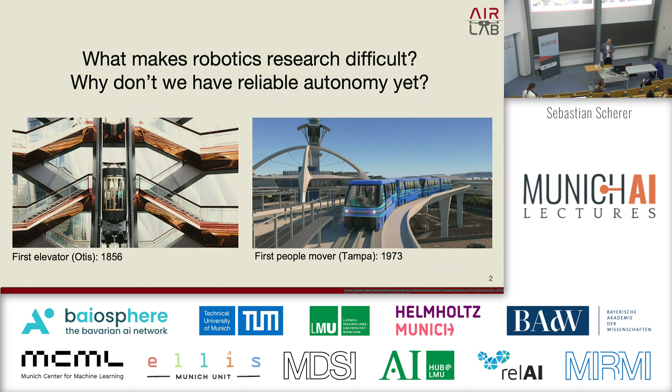Thank you, Daniel, and thanks for giving me the opportunity to talk a little bit about what we're up to and how we're thinking about autonomy. So I actually want to start at a very high level, and then we'll dig down into more of the details. If you think about it, we had elevators about 200 years ago, and we're still struggling with other autonomous systems today.

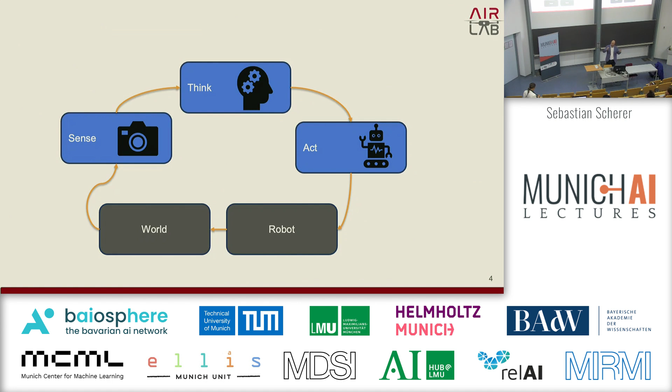So we're seeing that there's a lot of push to try and get these systems out. As I'm sure you're familiar, we have this traditional sense, think, act cycle, right? So what's the difference between an elevator and, let's say, a drone or a robot that's self-driving or off-road driving? There are really three main differences. For perception, for an elevator, and elevators are actually more complex than I'm making them here, but just to give the example, you have limited sensing with much lower noise. You know what state you're in, while for drones and robots, the perception space is much larger.

In terms of thinking, you have a larger action space. Instead of just discrete actions, you have an infinite set of actions, and when you execute something, you might not end up where you think you were going to be. So you're going from a discrete action space to an infinite action space. On a very high level, one way people have tried to handle this is to try and remove uncertainty. That happens in our everyday life. If you're driving on the road, if you're at an airport, you try to remove uncertainty by adding rules, by making right angles, by adding structure.

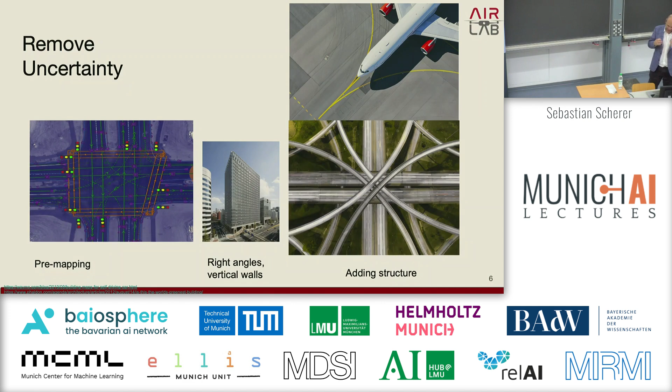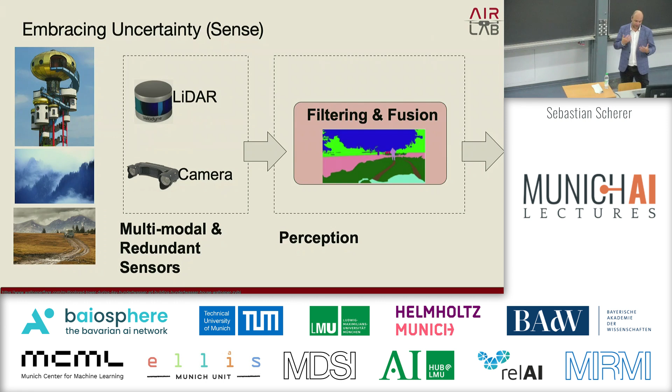But the kinds of problems that we're interested in are really where we are operating in these uncertain environments with much less structure, and you have to deal with that lack of structure. So really trying to embrace this lack of structure, you have to think about how to handle this uncertainty. The way we do this is at a couple of different levels. One is by having multimodal and redundant sensing, lots of filtering and fusion. And then on the execution side, to allow multiple futures and minimize the assumptions on the system.

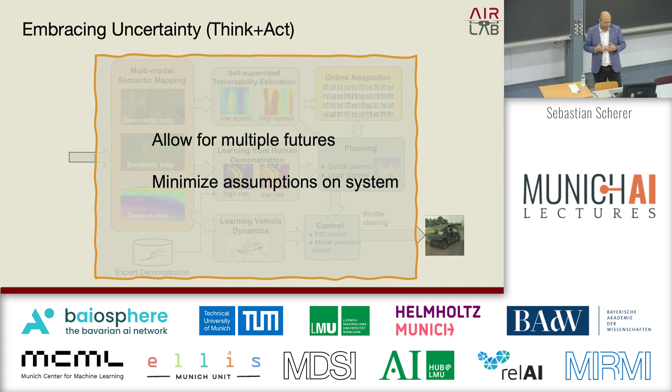Next, I'd like to give you an example of how we looked at this for the SubT challenge, and then how we are going beyond that right now to further handle these harder situations. One example to think back on: a lot of you might remember the Thai cave rescue for the soccer team that was trapped. The way they actually navigated was by hand drawing maps of the caves and trying to figure out how to get there. This lack of information was a real challenge.

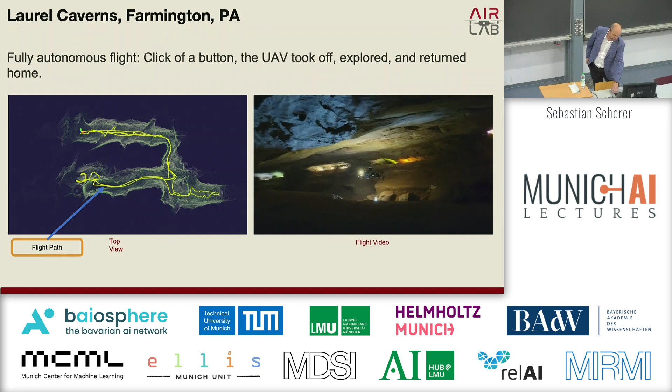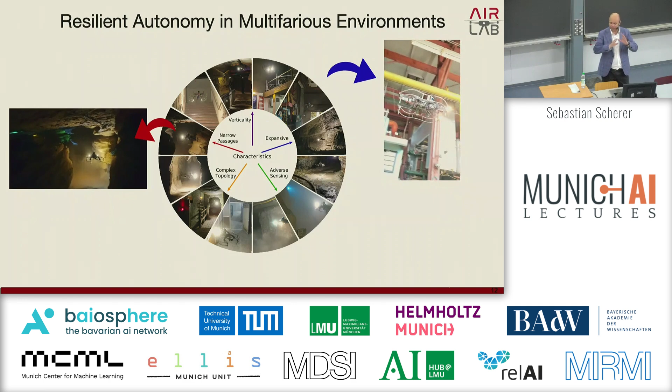As part of the SubT challenge, we looked at how we can solve this problem, not only for caves, but also for other situations. It really brought out a lot of challenging situations. Caves don't have any structure. You don't have level ground, you have slopes. There's lots of complex geometry sometimes. You can see here there's lots of thin obstacles. And then you have to navigate in these tight spaces with a complex topology. And then also vertical motion, as well as degraded sensing. Here we're flying, for example, inside a mine where we're kicking up some dust.

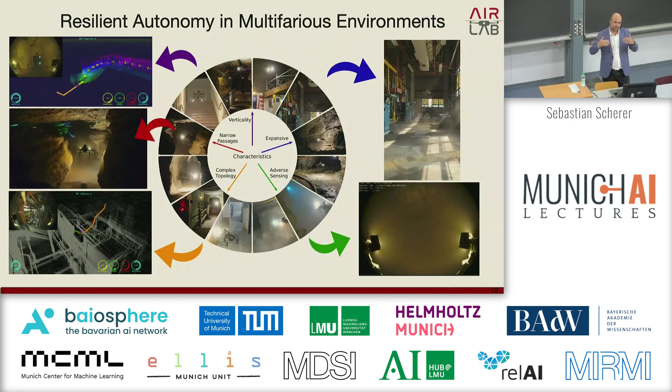This was all motivated by the DARPA SubT challenge, where there were three different types of environments we had to look at. So let me show you a little bit how we did this in a more traditional way, but also what it would take to incorporate learning, and how we improve the performance of these things without throwing away everything and saying, okay, we'll just go from image to action.

So one of the challenges actually starts with the problem formulation. The problem is not just an exploration problem where you're trying to maximize information gain of the area or something like this. You actually have two objectives. One is you're trying to maximize the map you see. At the same time, you're also trying to maximize the coverage that the camera has on the map.

For example, to detect objects, we typically use a camera a lot, and the camera has to look at something to be able to see it, right? So it doesn't just help you to create a map of that area. But our LiDAR scanner can see much further, so it can create a map 100 meters out, but the camera can really only reliably detect objects maybe 10 meters away.

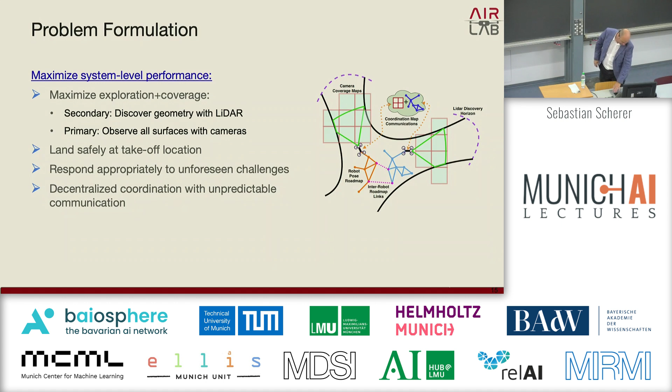So the way the system is decomposed is in these 5 components. There's the mapping part. There is the behavior executive that really tries to ensure that the system always has something to do and behaves correctly. A global planner, a local planner, and the controller.

And actually the behavior executive is quite important because in this setup, you don't really have a human operator that has the mental capacity to do anything, because they're running a team of about 10 robots, and they cannot control an individual drone and give inputs. So everything has to be fully automatic, and this behavior tree decomposition was quite useful to give it robustness.

One other thing to note here is you can see in the exploration tree there's actually many different behaviors, and one of the things that turned out to be quite useful is to have different behaviors if different algorithms fail, right? All of these algorithms have some shortcoming. And so there's one fallback algorithm in there, for example, that's the equivalent of go in a random direction, right? Because anytime we're just hovering, we are not gaining more information. We're just burning energy.

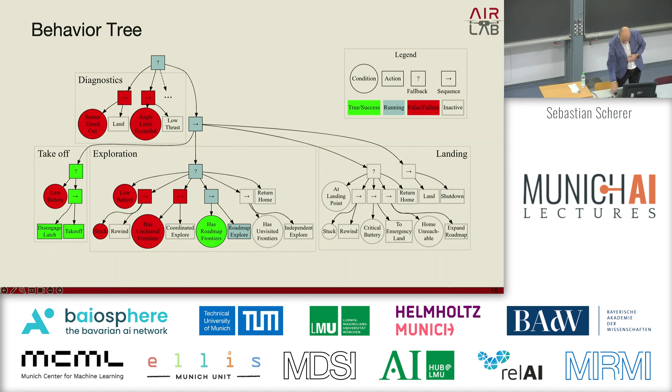So there's a couple different types of maps that we create: an exploration map, a navigation map, and a local planner map. Let me first tell you about the global maps. We want to create these frontiers for the system to go towards. In this visualization, which you'll see a couple times, the green map is what we have seen with the camera, and the gray map is the LiDAR point cloud map. So you can see that we see a much wider area with our laser scanner and a smaller area with the camera.

A typical way to construct these search points is to look at the surfaces and the edge between unknown and known, and that's actually not so effective, especially if you have things like dust and so on. So what we're actually doing here is subtracting the map of what we've seen with the camera from the LiDAR map to get our next goal points.

What you get from this subtraction is actually the points you want to look at. So what you then need to do is figure out which direction you want to see something from. And so we are sampling different viewpoints to try and figure out what direction to look at it, and then cluster these viewpoints to have a set of goals for the planning algorithm.

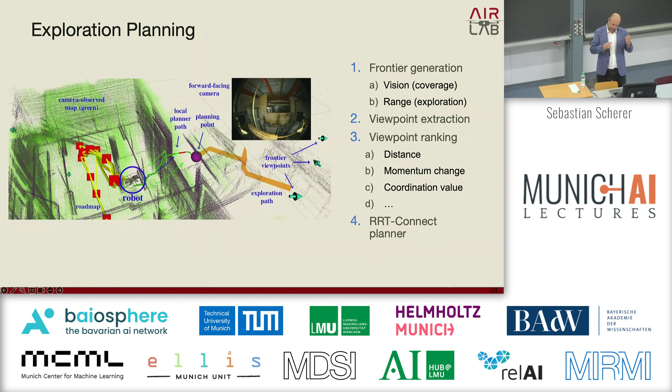And then we have a set of different planners actually running that can run depending on which ones are successful, and they have some hand-tuned objective function that they go for in exploring the space.

We can run multiple drones at the same time, and the way they coordinate with each other is using shared exploration maps. There are two types of maps that they share. One is a volumetric map of what another drone has already seen, and the second one is a road map, and that road map can be used to navigate quickly to an area if the area around the robot has already been seen many times.

And so here you can see an example of some of these shared maps. So we have this grid map here that tells us what has been seen by another robot. And then here you can see an example of this road map that's shared between different robots. It's also shared with the ground robots that are exploring.

And so we can put all this together then. Yeah, on the left you see what UAV1 sees, on the right you see what UAV2 sees, right? So it sees these red maps that tell it don't go in that space because another robot has already seen that. And so in the end we get these goals, and then these goals go to a local planner.

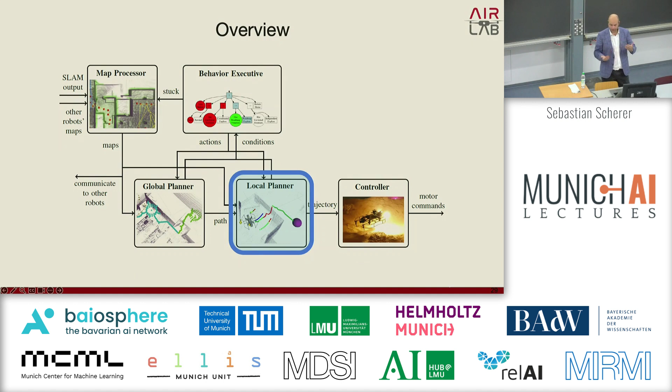And there's other things that happen here. One of the big factors is speed control, because it can be very narrow spaces and also large spaces. And then you also want to kind of turn to fit through narrow spaces like doors. And so let me just give you a quick sample of how this looks. I know I'm going pretty quickly, but I want to give you just a taste of what this type of system looks like.

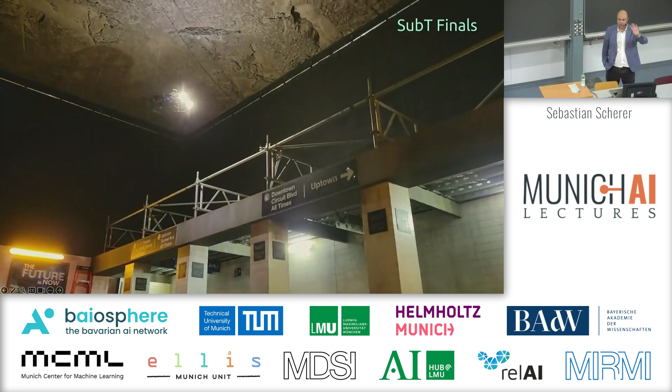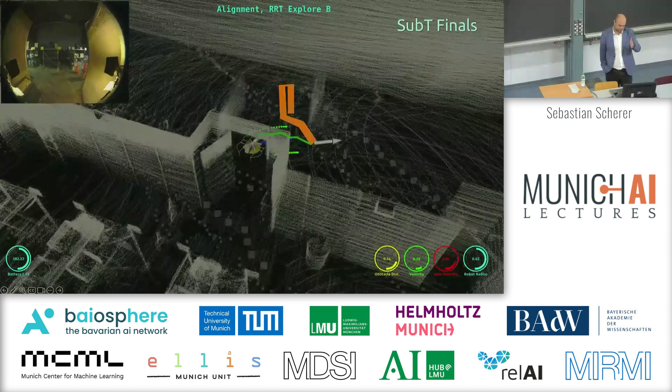So you can see here the system first looks in the bottom of that subway station, then knows that it hasn't seen the top, so now it looks at the top, and you can also see it kind of turning to turn the camera to look at different spaces. This is during the final runs for the SubT challenge. Here you can see it going through a door. And so all of this is fully autonomous.

You can also see here the robot moves quite a bit faster if the space is more open. And actually in this type of mines environment, you really don't ever want to hover, because as soon as you start hovering, you kick up dust and then you're done. So you can also see that here inside a cavern. And part of the challenge that we have to deal with here is as well dust filtering.

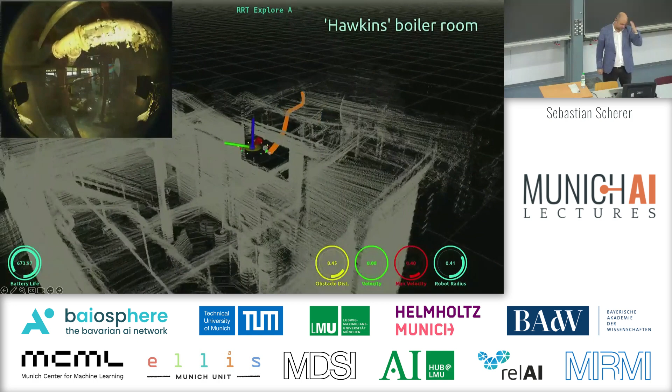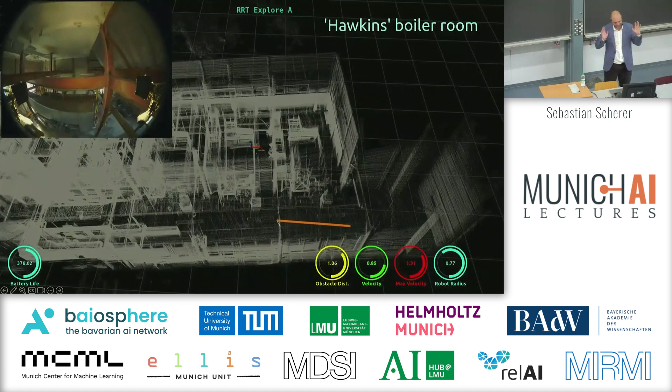So we have to filter out dust, but also, in this example, you can see there's quite thin obstacles. You can see these kinds of posts hanging down, and the system still has to be able to handle this. So all of this is fully autonomous. This example here was actually an accidental experiment. We wanted it to go down here, but then it found that opening and started exploring, so we just let it run. But you can see some of these challenges that the system has to deal with.

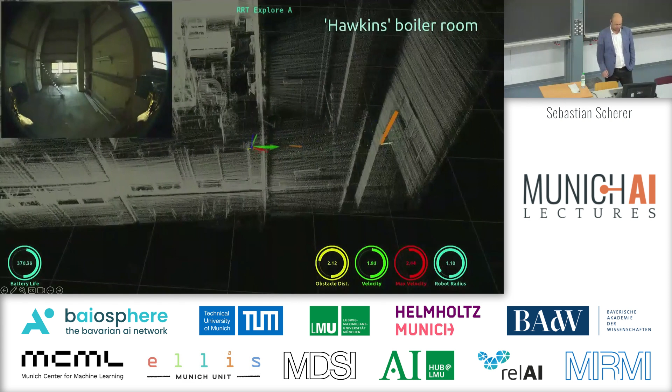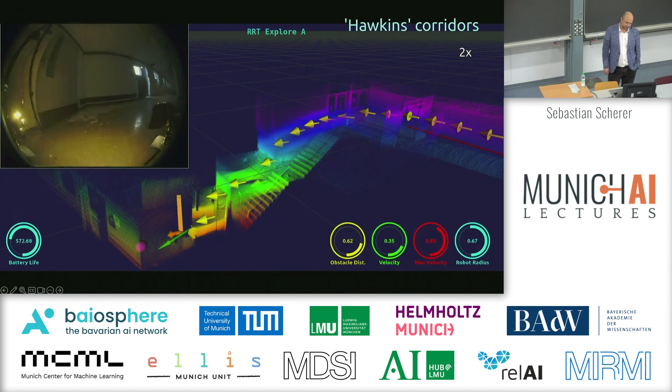And then also the camera field of view is a bit larger. Here you can see it going down a staircase. And you can also see some of the planning going on. This magenta point is the goal point that it has. And so these are some of the results.

Yes? What sensors does this system have? Is it camera, LiDAR? So it has, I didn't mention, a LiDAR on top, a fisheye forward camera, mainly for object detection, and then it has a top and bottom RealSense depth camera to be able to go vertically. For the depth camera, it's like 3-4 meters. For the LiDAR, it's about 80 meters.

Yeah. And so, one of the challenges here is also that the environments can vary in scale quite a bit. You can go from narrow corridors to a wide open cavernous cave that's tens of meters wide. Actually, this is maybe a good point for any other quick questions on this. Yes. The LiDAR. I'll talk a little bit about the localization later. Yes.

Yes. So the way the synchronization works, in the challenge there was what's called a DARPA frame. Basically, at the start of the competition area, there's some surveyed points, and we measure in the robots with a total station for the first robot, and then subsequent robots align themselves with the map of the first robot. So when they start out, they're basically aligned.

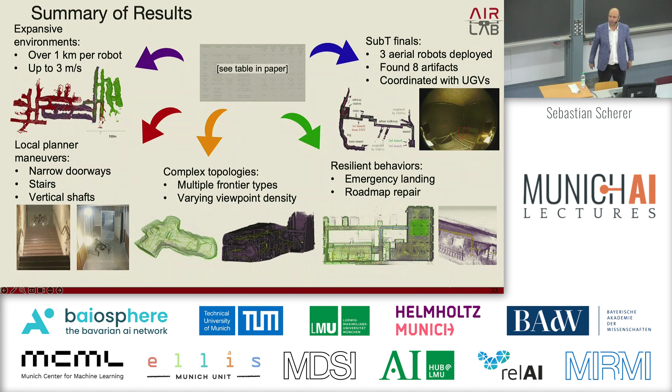So there are some lessons that we learned, and I kind of want to go back out a little bit again to talk about some of the things that we've been doing since. And so one of them is to try to avoid overfitting, right? You can see there's a really large range of environments, and it's pretty easy to make the system work very well in one type of environment, but we don't know what we'll get in the competition. So we actually have to try and find a set of parameters for these things that works in a wide range of situations.

And one of the challenges here also was just fitting all the computation on board, right? So we could have run fancier algorithms, but we had to do object detection on board, planning, control, everything had to be on board. So SLAM. The actual problem is a multi-objective problem. It's not just explore as much as you can, and we're really trying to get some resilience by having redundancy in a couple different ways. So there's, of course, multiple drones, but then also multiple algorithms running. There's multiple sensors for the SLAM.

And here you can actually see a nice case of recovery. So here the drone went into a tunnel. DARPA had set out some smoke bombs that really affected LiDAR. And so the drone detects that it can't go any further and then backtracks, but the SLAM had drifted a little bit, so it hit that sign, but then was able to recover and just keep on exploring.

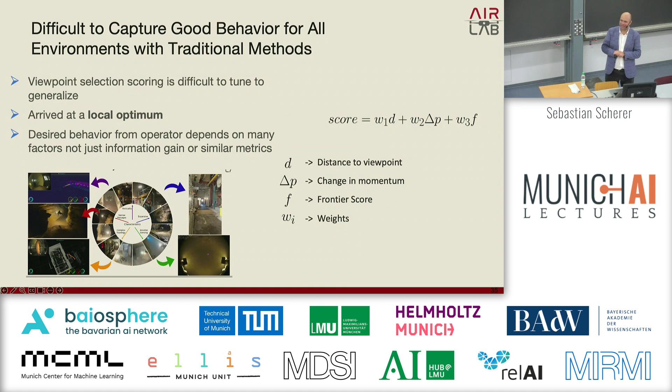So that's, yes. Another question: with all the sensors you have on board, the LiDAR, the depth sensing cameras, the monocular camera, for 3D perception and localization and path planning, it predominantly relies on the LiDAR. Yes. So this was primarily for computation reasons. For the challenge we mainly used the LiDAR. And once it kicks up dust, that affects the LiDAR. Right. Yes. Actually, it affects the LiDAR probably more than the cameras, because you're sending out a laser beam and then you're getting a straight reflection back from the dust, while typical visual sensors will triangulate, right? So you're actually triangulating past the dust. So even if you have active illumination and you're triangulating, it's actually better in dust.

So we actually had to do quite a few tricks for the dust. One of them is on the local mapping side. We have a dust filter that removes dust and then actively adds thin objects that are linear back in. So we actively detect things like wires and other things that are hanging down because you'd lose those otherwise.

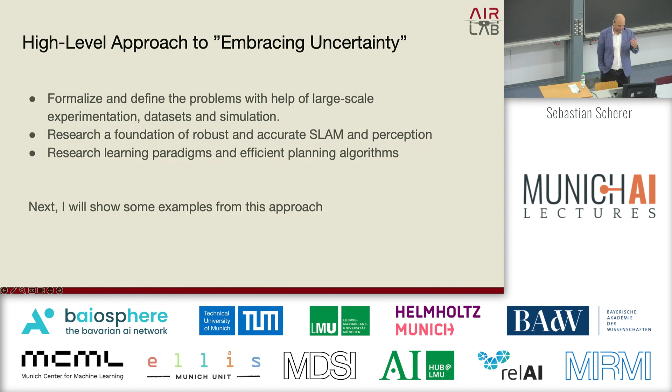And then also on the action side, we don't necessarily know what the executed action is. So can we learn that? And so in the lab, we've been trying to go down three thrusts to overcome this. So one is to try, because we do a lot of field robotics, to come up with these problems and provide challenge data sets and simulators and so on that are useful for these problems. And then get some good perception outputs and then see how we can use those for effective decision making.

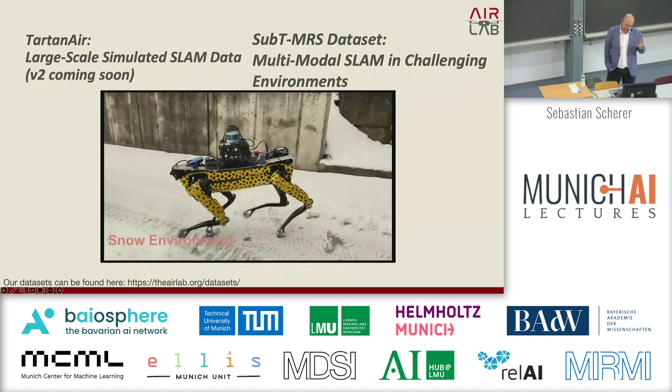So let me show you a little bit about these data sets. So we have released two data sets. One is a very large simulated data set called TartanAir, and then also a real-world data set that's a combination of data from the SubT challenge plus some other local data that we've collected with many different types of degradation and challenges.

And the idea is that the simulated data set can really help you if you want to do something learning-based, because there's zero noise. You can eliminate all noise. So if you're, for example, trying to learn a transform or something like this, it can be very helpful, and still add degradation and so on. And then for the SubT MRS, it's really helpful because it's realistic data, again with ground truth, where we've taken survey scans of an environment and registered this to real-world conditions.

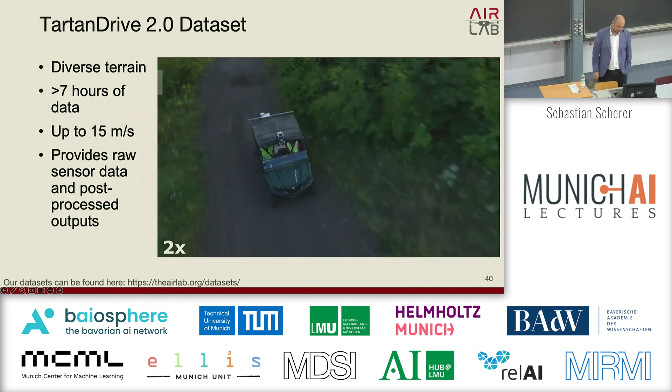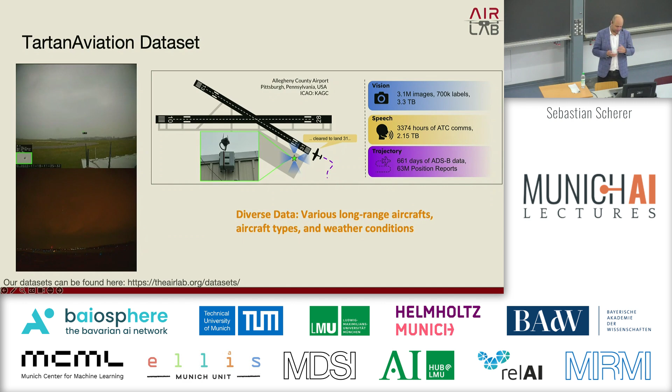There's some other data sets, for example, the TartanDrive data set that's more for off-road driving. So it's a lot of driving in very diverse terrain, on trail as well as off trail, with lots of proprioception data. There's also the TartanAviation data set, so that's more for visual detection of aircraft, but it's similar. Also, you get air traffic information as well as speech information.

And then most recently, we just released a data set that's one year's worth of air traffic in the US with some nice Python APIs, as well as a trajectory prediction model that's trained on this data. And it covers about 48 airports, has maps on it. That might be useful for some of you.

So we use these data sets to really try and move things beyond these simple data sets that are out there, that are not really suitable and were often not initially designed for learning-based systems. I mean, if you think about something like KITTI, it has been great, but it does not generalize to anything learning. Like you don't want to ever just show something on KITTI.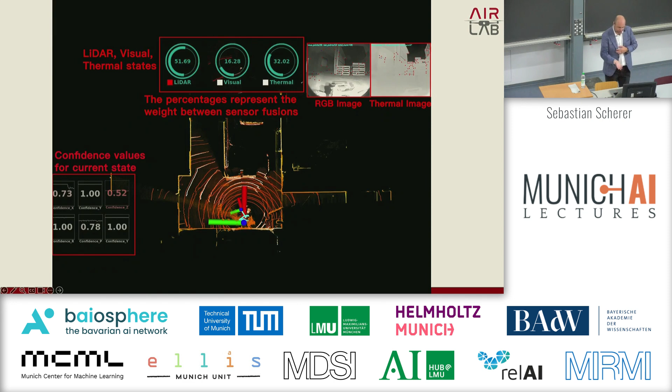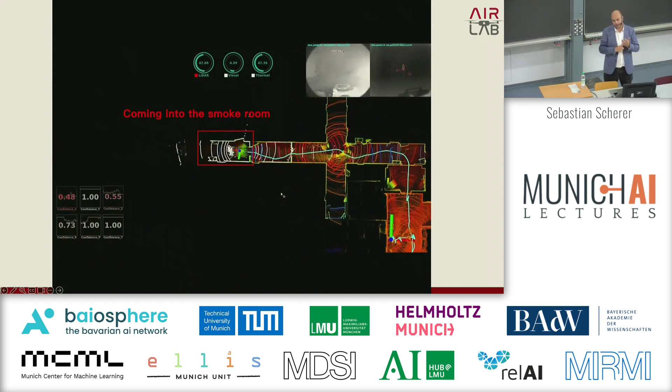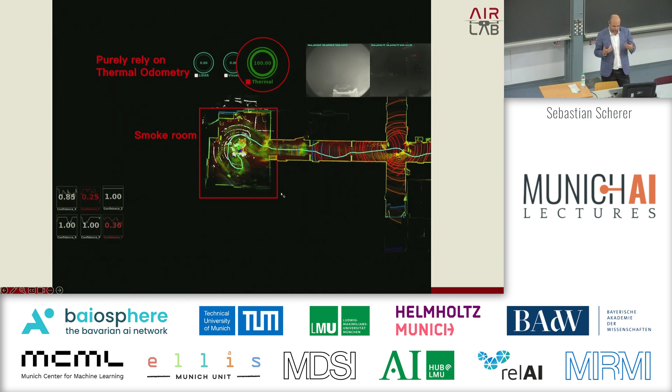So I think there were some questions about the SLAM. So what we ran in the challenge is an algorithm called Super Odometry. We've been working on this since. So this is a multimodal version of Super Odometry that includes visual and thermal data. So here, for example, we're going inside a smoke room, so the LiDAR and the visual will not work at all. And then here it's only relying on the thermal cameras to do thermal odometry. And then when it gets back out, it switches back to the LiDAR.

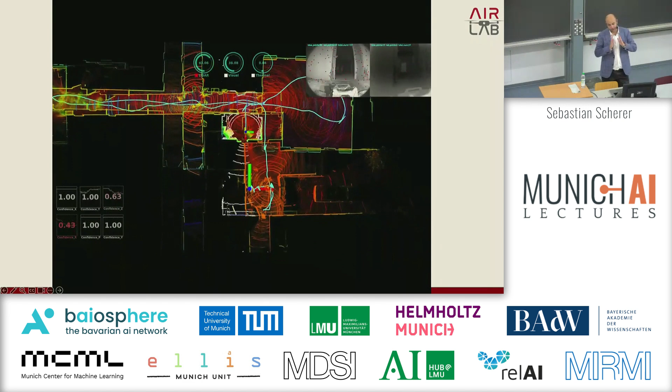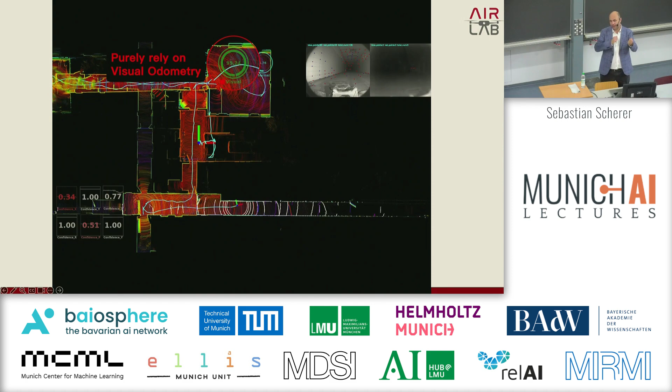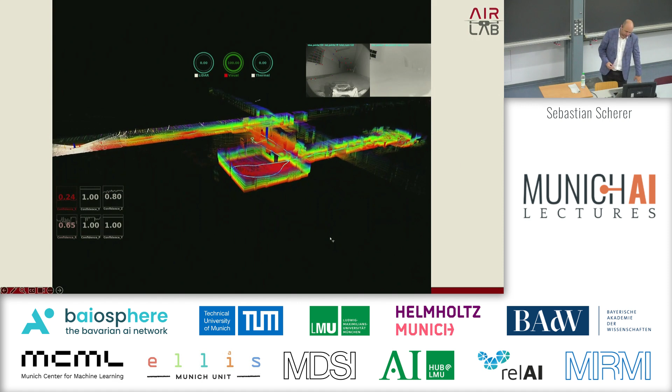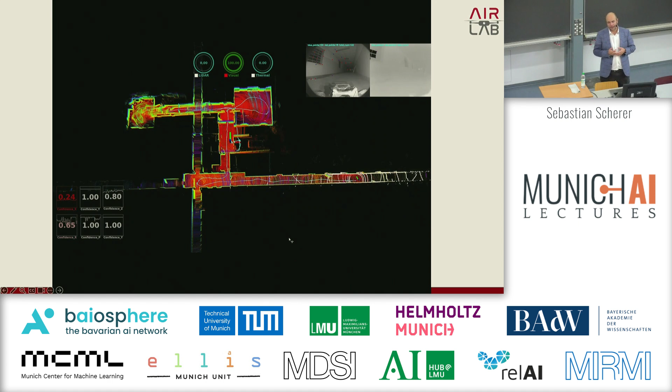Then it actually gets to some corridor that's very thin and long, where the LiDAR does not have enough features, so it transitions over to the visual odometry. And so the trick here is, how do you actually get a good uncertainty to be able to do this trade-off reliably? That's one of the big challenges here. And so we look at the structure of the features to tell us which directions are constrained, and you can see in the lower left here, these 6 numbers tell you how well the LiDAR odometry is constrained, and that's really the driving force, because LiDAR odometry is often most accurate for us.

Some things that we've been looking at more recently is Gaussian splatting for SLAM. There's an algorithm called SplaTAM, and this is still, I would say, not as reliable as the Super Odometry type algorithm, but has the potential to give you much denser mapping, and also to do some interesting filtering to allow you to be robust. So that's something we're looking at in the future.

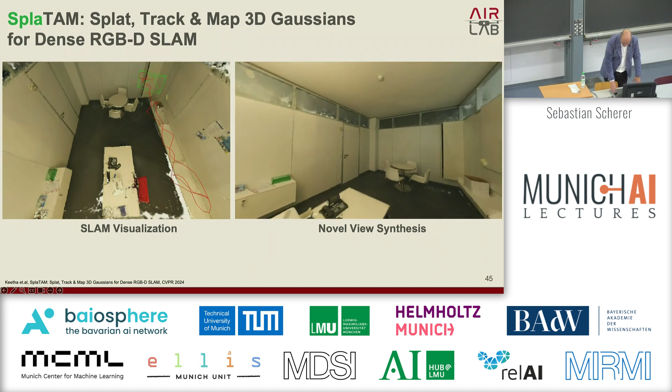And then we've also looked at place recognition using some of these foundation models to try and relax some of these constraints that we had, for example, for this initial alignment, instead using this place recognition to allow us to detect places.

So there's an algorithm called AnyLoc that we've developed. And then the third thing is, on the perception side, we rely pretty heavily on LiDAR right now. And so the goal has been, can we do some depth perception using three fisheye cameras that are upward looking to try and extract depth maps.

And then the third thing has been to try and push going into smoke and getting better depth maps there. So I've been looking at using thermal images for depth mapping. And thermal images are actually a little challenging, both for odometry as well as depth mapping, because they have very unique noise profiles, as well as the dynamic range of the images is typically 16 bits, so you have to choose the right range of pixels you'd want to get out.

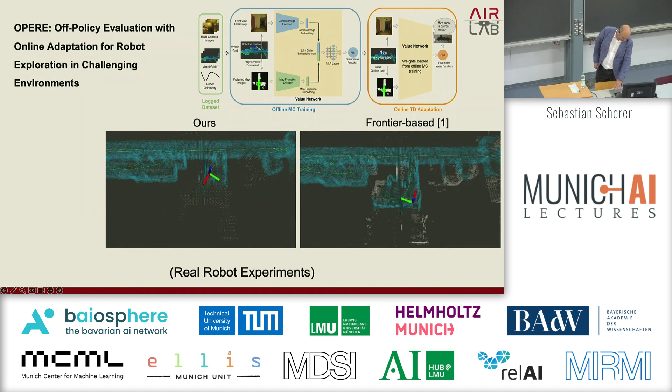And so we can use that to learn a reward function, and that can really help you with exploration. I don't know if this is the most convincing example, but we can explore better if you look at the paper.

And so now we'll switch gears a little bit. I've showed you a lot of flying things, but we've also been working a lot on off-road driving. And one of the big philosophies we have there is that you cannot really label data well. So for off-road driving, if you're also off-trail, if you label a rock, there's big rock, small rock, it's really hard to label these things in a good way. So we've been looking at how can we predict roughness using onboard sensing or imitation learning or trying to explore.

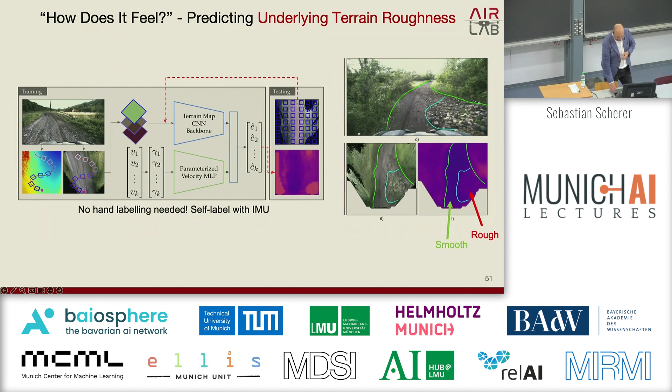So this was one paper where we used the IMU data to basically look at how much acceleration we experience, and that tells us how rough the terrain is, and then we can use that information to pick different speed maps. So here we have this area, and then we learn different cost maps for different speeds, and you can see here that it is able to pick up the cost of the different trail. So it doesn't say you can't drive into the grass, but at high speeds it's pretty expensive to drive into the grass. And the input here is a stereo depth map from a learning-based stereo that we developed called TartanVO.

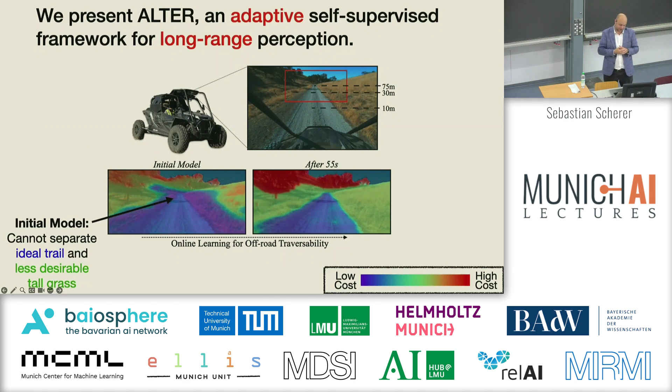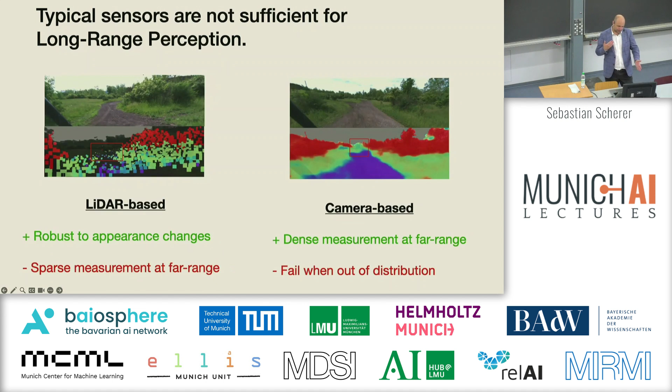Additionally, one of the problems we have is that we have pretty dense information from the LiDAR close in, but as we look at further ranges, the data is not dense enough. So what we're doing is self-supervised learning based on the close-in information to extrapolate the maps to the long range on the fly. So it's basically learning on the fly to extrapolate this information. So you can see here, this is the type of LiDAR input that we have, so it's pretty sparse, and then we can adapt this information on the fly to build a denser long-range prediction that we can use for better decision making.

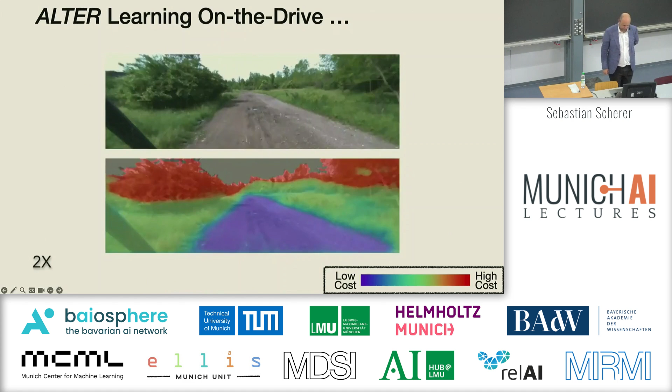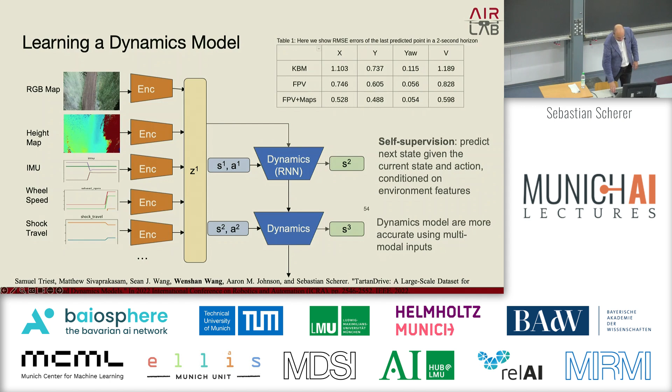And then lastly, when we actually execute the commands, there's a lot of uncertainty, right? Like, we can try to identify a model, but that model, with slopes and gravel and grass and so on, is going to be uncertain. So what we've been looking at is some ideas for physics-informed neural networks to try and learn a prediction model. And there's a couple different ways you can do this. You can try to predict a delta, you can try to predict the whole thing.

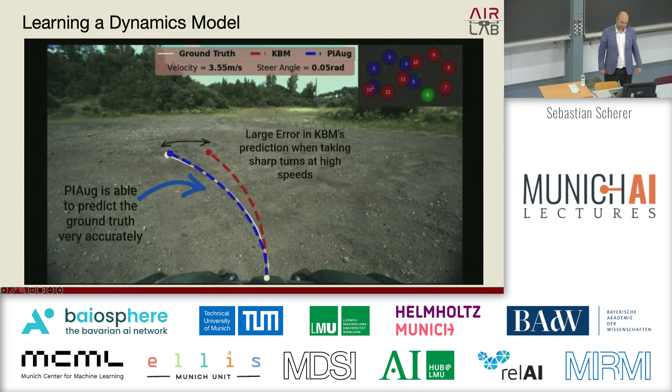So once we have all these inputs, we have these raw kind of cost-like estimates. So now we want to know how should we drive, right? Should we go left? Should we go right? And so what we do there is inverse reinforcement learning, and essentially use this data set that we collected to try and match the frequencies of where a human drove with what we predict. And so then we can put all that together and then guide the robot.

But for the SubT challenge, one of the things we did have to deal with is you have narrow corridors, and you might just meet each other, right? And so now what do you do? And what if the corridor is too tight that you can't get past each other, right? So now you have to come up with some kind of parking routine because your drone might run out of battery, and so there's a whole local avoidance that also considers the speed to try and avoid this. But yeah, for the off-road driving part, we have not looked at dynamic obstacles.

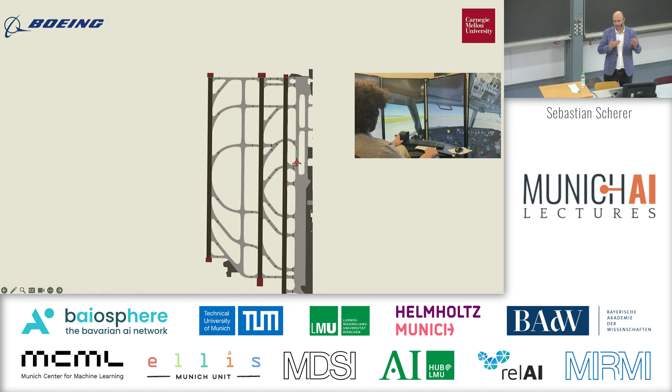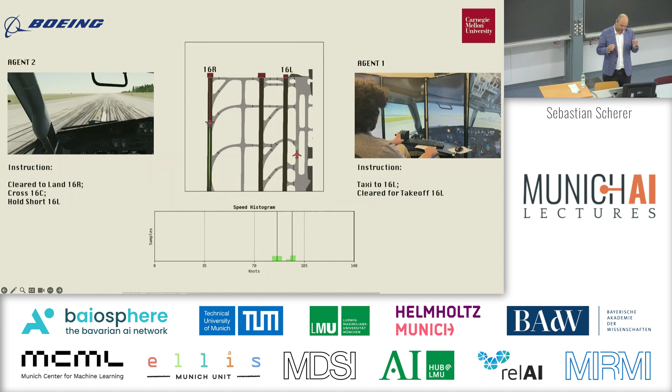So kind of the last thing before I wrap up is some work that uses this data set I talked about earlier to do intent prediction, right? And as some of you might remember this case in Haneda recently, where another plane landed on top of another plane. Here's one example that we had actually simulated and then tested using our policy that actually happened in real life a month later. And so this runway incursion is actually a big issue.

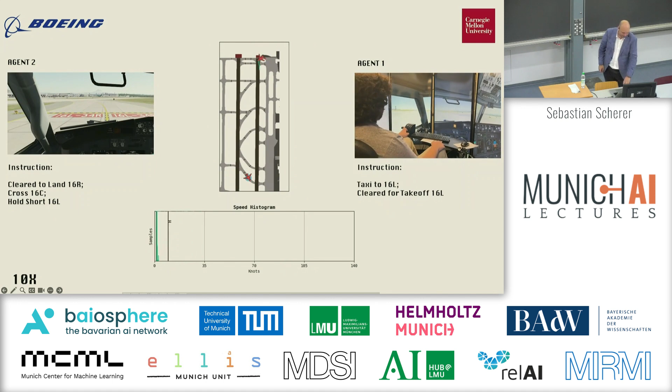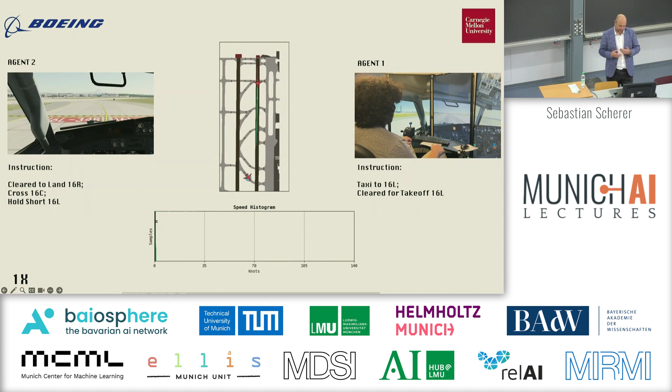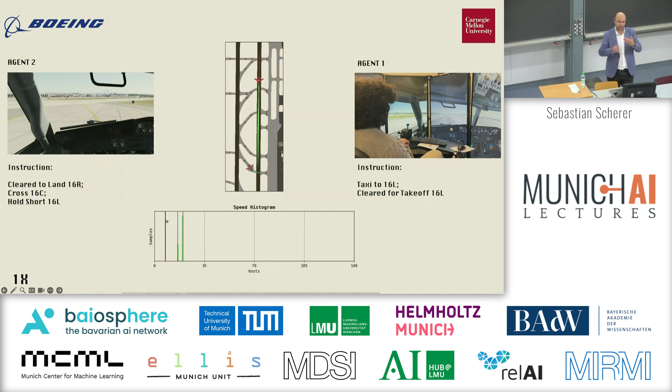So you can see here there's a plane that's holding short of this runway, and then there's another plane that's taking off. And so now that plane that's waiting is supposed to stop, right? But now he's going to start moving at some point. And then now the plane starts moving, and so we can actually detect that it happens before crossing the hold short line and that a bad event is happening. And so this whole game here is how early can we alert without having too many false alarms, and basically trying to push out that prediction horizon as far as possible.

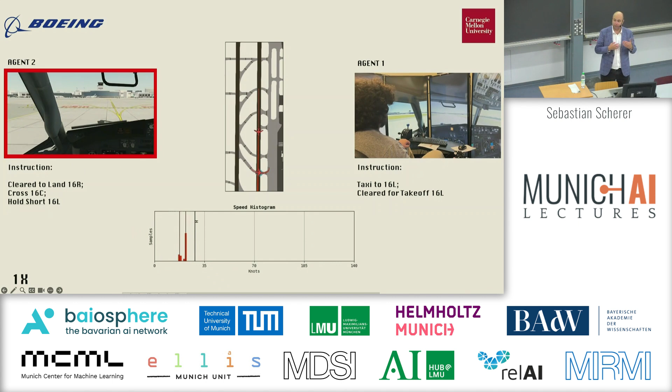And so a lot of this is about mapping the speed maps, right? Like what is the distribution of speeds that somebody is going to go at, because the types of decisions are pretty fixed, right? I mean, there's usually 2 or 3 junctions, and the real key thing are hold short lines.

So that gives you some of the updates of what we've been up to in terms of our most recent research. Maybe trying to come back out a little bit: what is wrong with the current state of the art, right? There's great success in various subtasks. There's some of these end-to-end action models, but I've not seen them very successful. And the tasks that they can do are limited, and they're unable to abstract.

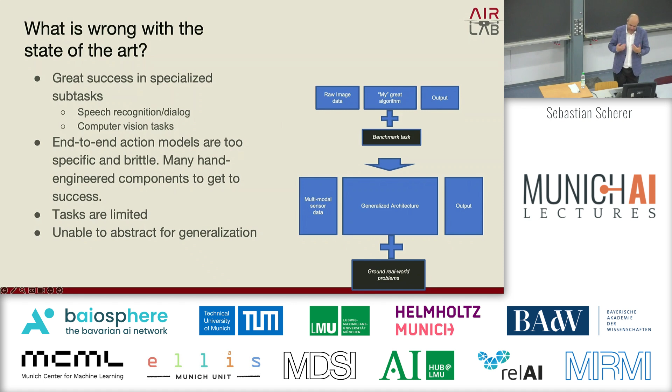And so I think one of the high-level things is that this feed-forward type of system is not enough, right? Most of the systems you look at right now that try to do RL or something like this, you're going feed forward. You have some input, you're mapping to an output. And that's great to learn a compression of your actions, and you get lots of leverage with learning frameworks, but you have a limited ability to reason and abstract, right? And that's really the piece that's missing.

And so one of the things we've been thinking about is how do you take these types of good things you can get with deep learning right now, which is these kind of open world perception models.

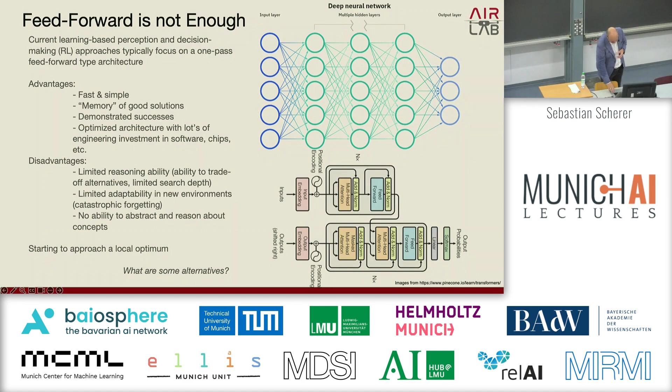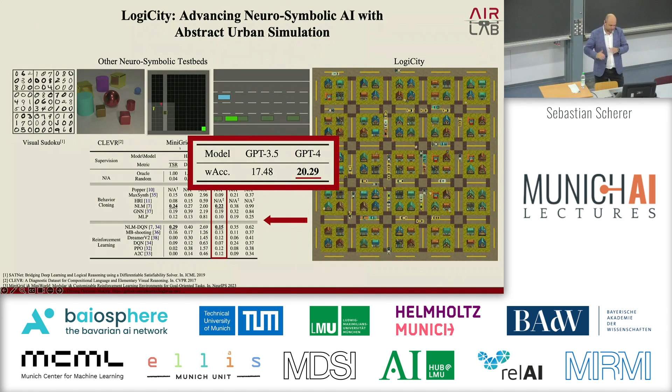You can actually get some sense of symbols, but then maintain the ability to abstract and reason. And so there is an area in learning called neuro-symbolic AI, and there are interesting methods there, but they've really been focusing on very toy tasks that are not really robotics-relevant right away. So like MNIST digits or some very simple benchmarks that have very specifically instantiated symbols. So we sat down and really tried to push for a benchmark that's a little more relevant to robotics. And so we call that LogiCity.

And so the way that works is that we have abstract first-order rules. So we have some concepts, rules, and then we have instantiations of a set of agents. And then we have a simulation that takes these inputs, uses an SMT solver to try and figure out what the next tasks are, and then goes to the next state. And then we also have a rendering engine that uses diffusion models to be able to generate a large set of different appearance-looking simulations. So if you want to have perception models, you have some way of generalizing and showing generalizability.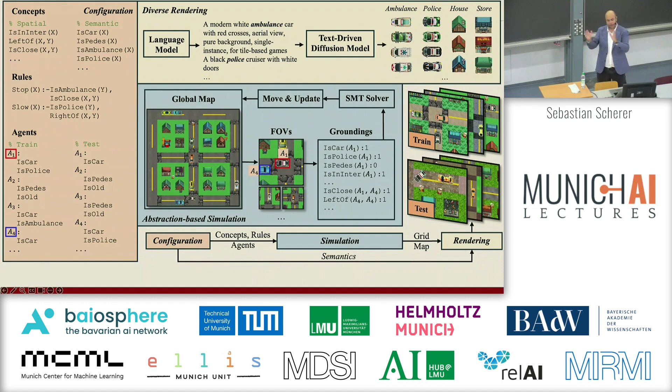And so the nice thing here is that we know the ground truth rules and concepts, right? So it's not just some hidden Atari game where we don't know all the rules and can't write them down, you can't change them, and you can't have abstractions. Here you can have an abstraction and you can transfer it to another world, and ideally your algorithm should generalize. And so based on this, we define two benchmark tasks.

One is the sequential decision-making task where you really have to reason over a long horizon. So you want to go from a start to a goal, and you have to reason, hey, should I stop, go faster, slower, and so on. And there's different rules in here, things like stop signs, ambulances, pedestrians. So you have to be able to discover these rules. These rules are not known to you.

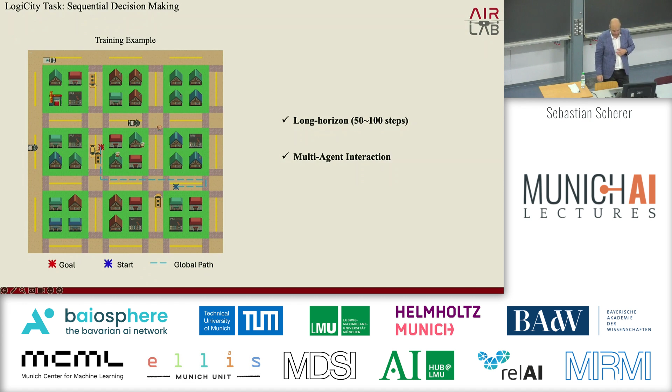And then another task is this abstract visual reasoning task, where you're given an image as an input, as well as a set of groundings for the agents, but you don't know what rules those agents necessarily have, and you're trying to predict the best next action for each of the agents. And so this is just a start to try and really push some of these methods more towards a robotics-relevant application.

And so we hope that having these abstractions will allow us to get to learning systems that can also reason, where you can still use RL to compress this into a policy that's faster. You can always do that, but it gives you a way to generalize and also maybe handle things like catastrophic forgetting.

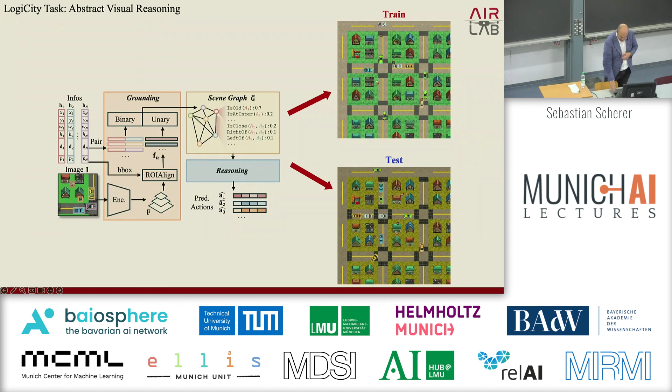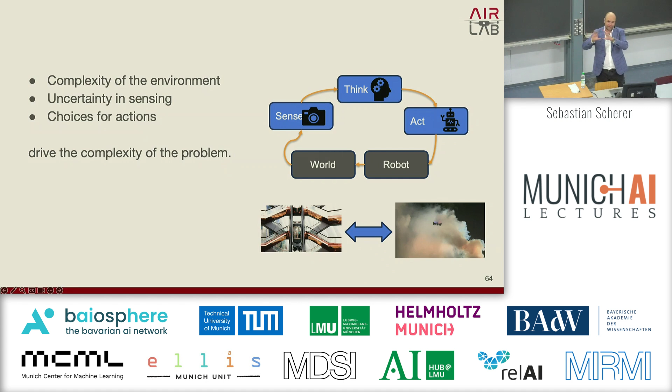So just to summarize, the complexity of the environment that we look at drives a lot of our research goals. You have to think about uncertainty in sensing to make good decisions, and the choices of actions also drive the complexity of the problem. So if you're trying to go from an elevator more to something that's flying in the wild with a lot of uncertainty, there's a lot of things that need to happen to be able to do that successfully.

And if you look at a lot of current learning paradigms, they're very brittle to domain shift and adversarial attacks. You can think about just shifting the brightness of an image, and you might not actually detect an object anymore. There are very easy ways to mess up object detectors, just as an example. And this feed-forward inference of network architectures is not sufficient for intelligent decision-making. If you think back to the beginning, where we have this hand-engineered, quite complex system, even if you want to learn this end to end, you still need to have this type of behavior in there.

And one of the areas we're looking at is trying to combine symbolic reasoning with neural approaches to create good abstractions that hopefully generalize with less data, since in robotics your data is much more limited than in a pure computer vision sense. And there's still a lot of work to do in terms of learning from experience, learning continuously, all these things.